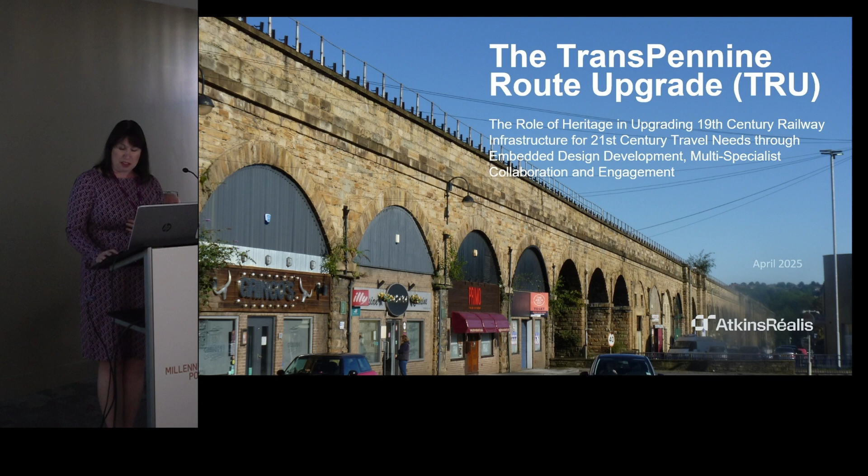Just a reminder of who we are. I'm Katie Rees-Gill, Associate Director for AtkinsRéalis. I've been with the company nearly 20 years, and I put that down to the really interesting projects and opportunities I've had. My colleague Matthew Jenkins opened the session, and he's had a very good stint with the company too, coming up to nearly 10 years.

What we both want to run through today is an overview of the scheme, for those of you that don't know it. I'm going to talk about collaboration in its widest and truest form, not just as a profession, but how we are seen by other disciplines and how we need to work with other disciplines, organisations and specialists. Matt will be talking about embedded design and a particular case study of Huddersfield Station, which is grade 1 listed. Then we're going to round the session with questions on both projects and both presentations.

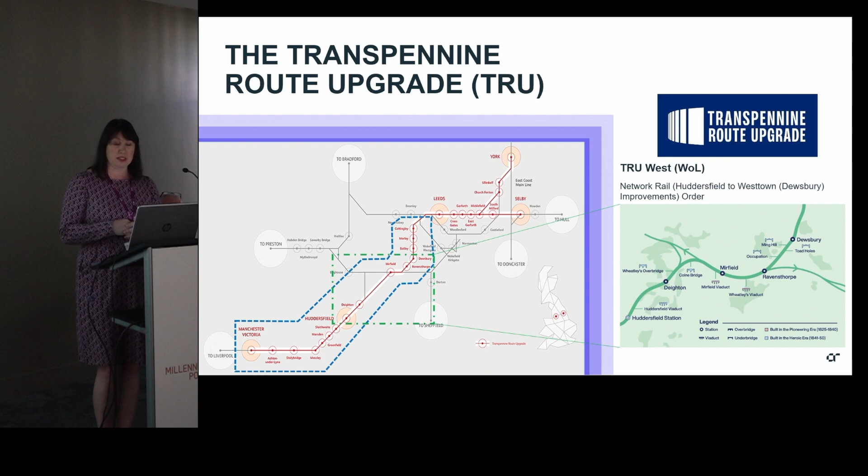So the TransPennine route upgrade, or TRU, runs from Manchester Victoria in the west through to York Selby in the east. We've been engaged in what's called the West of Leeds area of the project, which you can see highlighted in blue - Manchester Victoria, just shy of Leeds Station. This presentation today is focused on the area outlined in green, from Huddersfield Station through to Dewsbury. You can see the schematic on the right-hand side showing the 9 listed structures we've been managing as part of this upgrade.

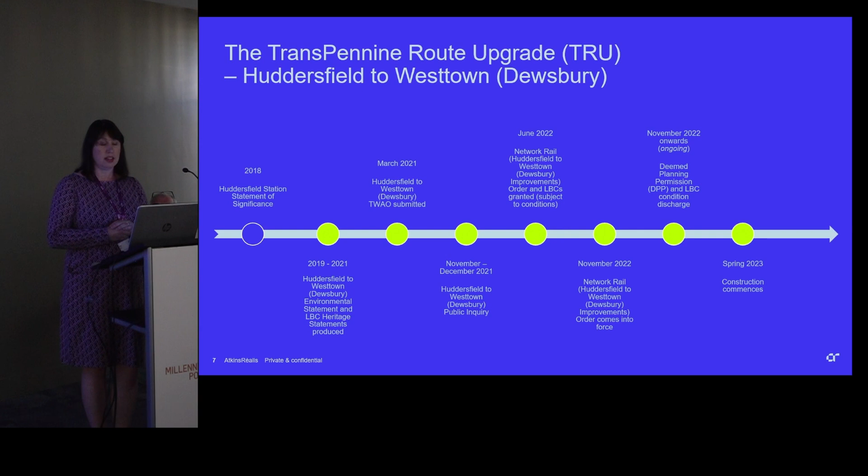We've been involved in the project since 2017, and a whole raft of documents had to be produced at the beginning, including the Statement of Significance for Huddersfield Station, the environmental statement and heritage statements to accompany the listed building consents. The Transport and Works Act order was submitted in March 2021, and at the end of that year there was a public inquiry. The order was granted in June 2022, along with the listed building consent conditions and planning permission. The order came into force in November of that year. We've been discharging those conditions since November '22, and construction commenced in spring 2023.

I want to show the range of partners, collaborators and specialists involved in the project. We've had to communicate and engage with all of these people, and it's right that we've been doing that. As you can imagine, that's quite complicated and shows there's a diverse range of specialists, knowledge and partners engaged in these big mega infrastructure projects.

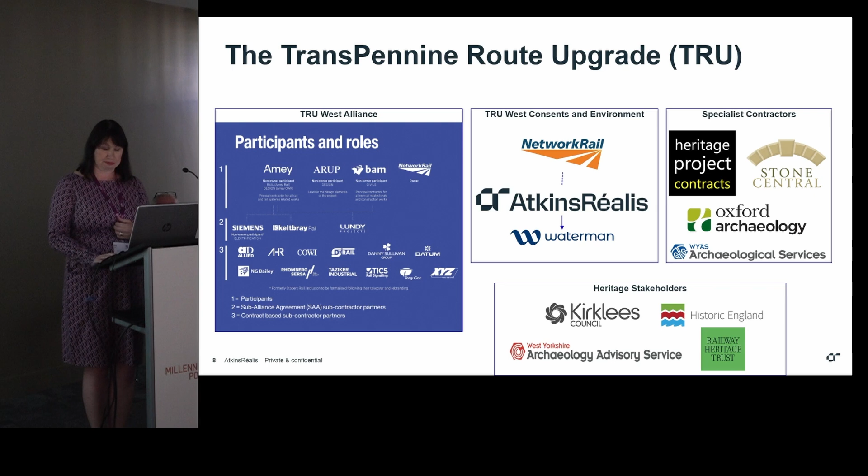So I'm going to talk now in a little more detail about the collaborative approach we've taken, how successful we think that's been, and how that's really helped to shape the design of this project and influence its delivery and implementation. I want to start by saying early engagement is absolutely vital - we've got to be invited to the party, we've got to have that seat at the table.

We've got clients such as Network Rail and National Highways wanting us involved in the early stages of these schemes, feeling we can make a valuable contribution to the concept, optioneering and design needed. This gives us an opportunity to find our voice, raise concerns and help de-risk the project. It's important we position ourselves at the very early start of engagement on these projects.

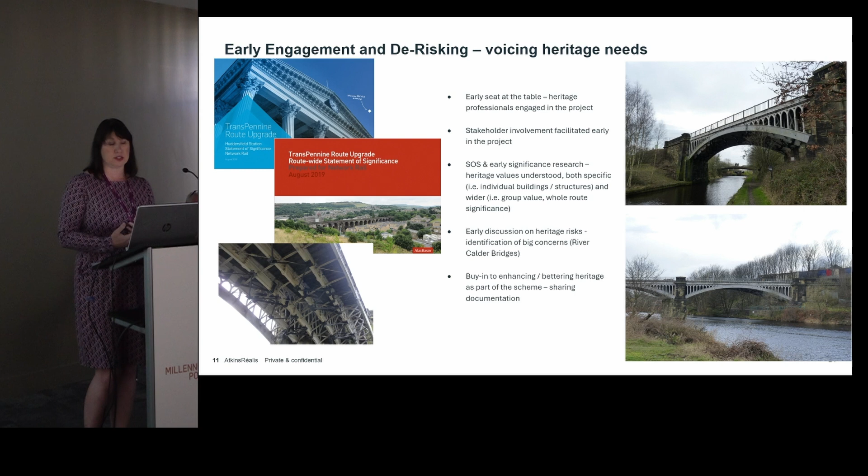That gave us an early opportunity to discuss the design of the new structure, the setting of these historic bridges, and how we could ensure their legibility and historic importance was still maintained. So we do need to consider that.

In the true spirit of collaborating, it's not just about us voicing our concerns - we also need to listen, to understand the project goals and challenges of these mega infrastructure projects. It's not about being a heritage specialist in isolation, in our silo. We need to understand the engineering language, what engineers are conveying when they speak to us, the design drivers we need to appreciate, and where the constraints lie. It's important we open our ears, sit down and listen to other specialists and designers, and appreciate what they're trying to do.

One of the most interesting elements of this project was that Network Rail were keen on what they called collaboration workshops, bringing all specialists together to talk about how they work, how they operate, how they think about problems, and how they discuss and disseminate information. This wasn't about creating a one-size-fits-all template - it was about appreciating that we all work and think differently, and incorporating that diversity into our day-to-day relationships on this project.

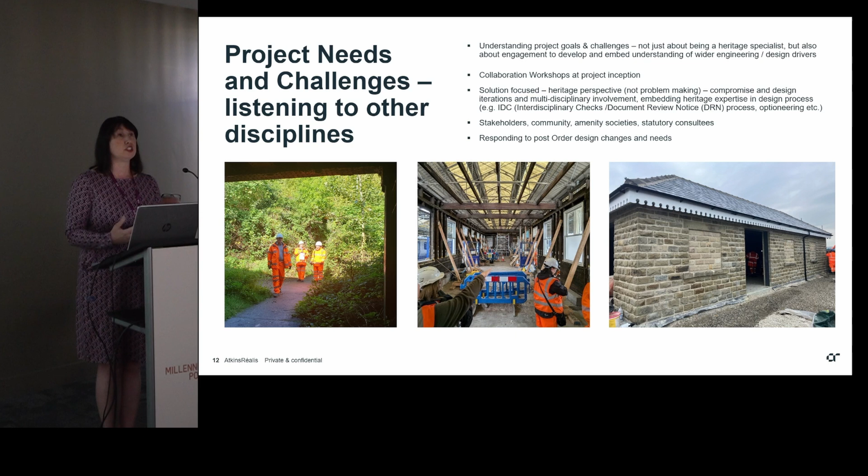We also need to think about how we can be imaginative and innovative, how we can do things that make these projects run smoother and actually bring benefits. One of the successful parts of this project has been the implementation of the Conservation Implementation Management Plans, or CIMPs, as we've called them for short.

Working with Network Rail, Kirklees Council Conservation Team, and Historic England, we came up with this approach, which would allow us to discharge conditions in a phased manner of partial discharge, so we could align with the construction sequencing of the project and enable the scheme to proceed. That's really important, that all parties agreed to this approach - it was tabled at public inquiry, we got buy-in, and that's been one of the most successful elements.

So, for example, Huddersfield Station, which Matt will come on to talk about in a little while, has had 5 rounds of CIMPs because of the complexity of the construction work and the amount of conditions we need to discharge as part of that work. But it's proved effective, efficient, and we've been able to work very closely with Kirklees Council in delivering that.

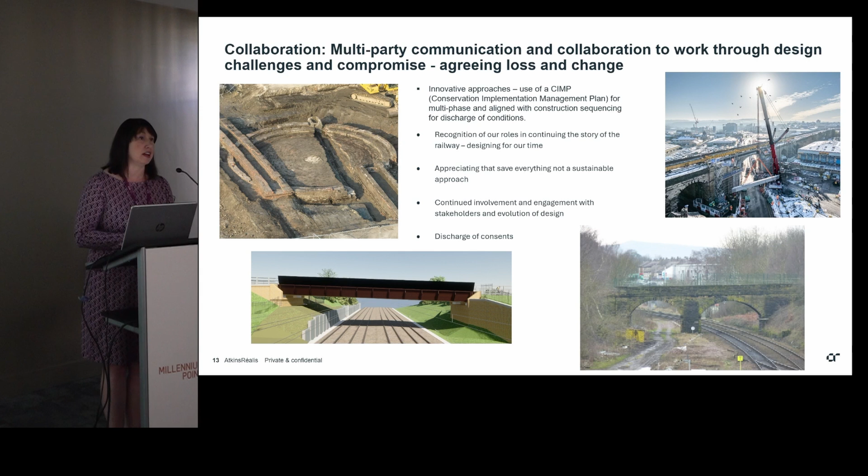We've got a visualization of that on the bottom left, replicating the industrial heritage of this area, and particularly the colliery found there.

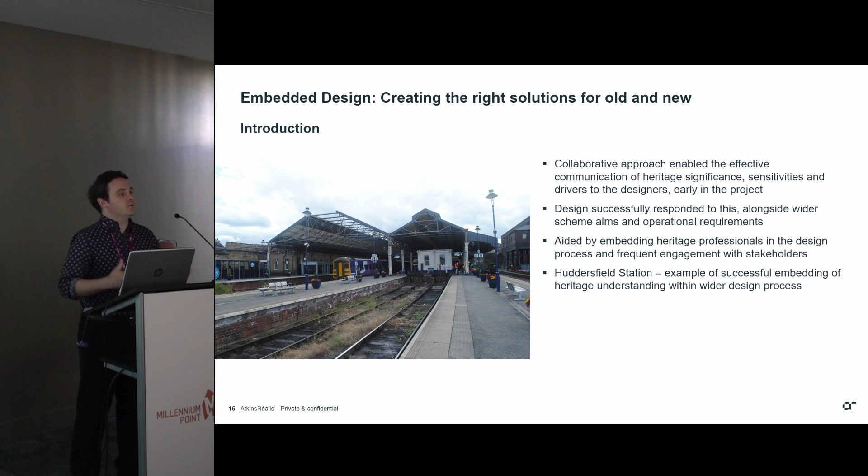From the statement of significance, one of the areas we identified as particularly significant to the station is the roofs, shown in the left-hand picture. They don't look like much, but they're actually quite important - a rare surviving example of what's known as a Euston Truss, named after Euston Station. This type of roof was used heavily throughout the country in the late 19th century, particularly by the London North Western Railway Company, LNWR. The survival of these is relatively slim - there aren't many left, and Huddersfield represents the largest example in terms of width of span.

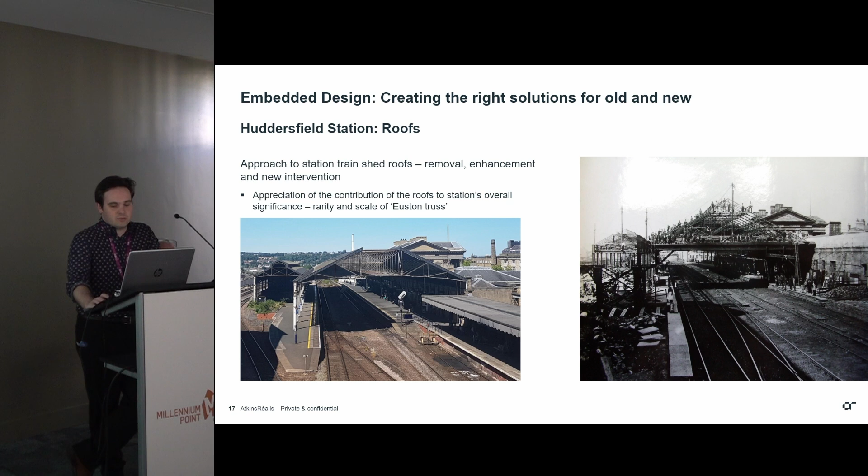The roof on the right-hand side, referred to in the project as Roof A, the principal roof span, is particularly noted for its rarity. I mentioned the criticality of the operational intervention at the station - one of the key things the scheme needed to do was enable greater train movement from one track to another through the station, as well as providing additional and longer platforms.

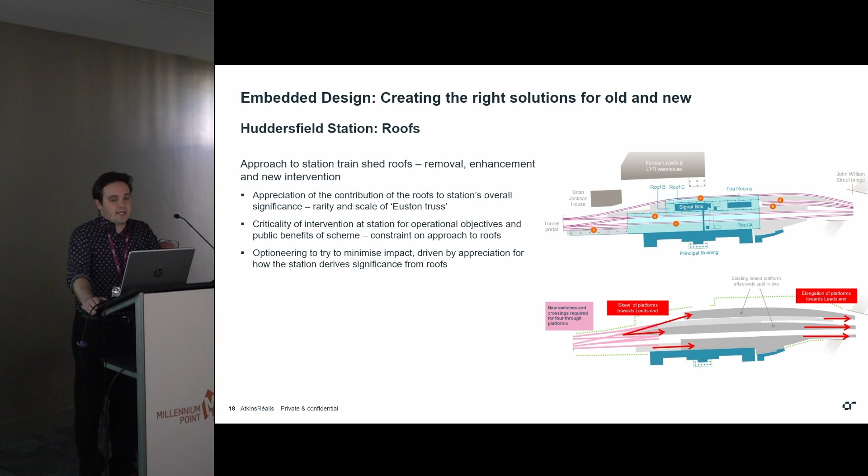If this station wasn't listed, if it was non-historic, those roofs probably would simply be removed. But obviously we knew we couldn't do that because of the contribution they make to the significance of the Grade 1 listed building. So we were heavily involved in an optioneering process to try and reduce the impact on the roofs as far as reasonably practicable.

and find solutions that can lead to the retention of heritage significance and that contribution that they made. The upshot of that was a decision to regrettably remove the smaller span of the roofs, Roof B and C, and also 2 bays of the end of the principal Roof A. But to retain the rest of the Roof A span, and importantly to look at opportunities to enhance it and better reveal its significance and the significance of the station as a result, as well as improve passenger comfort through doing that.

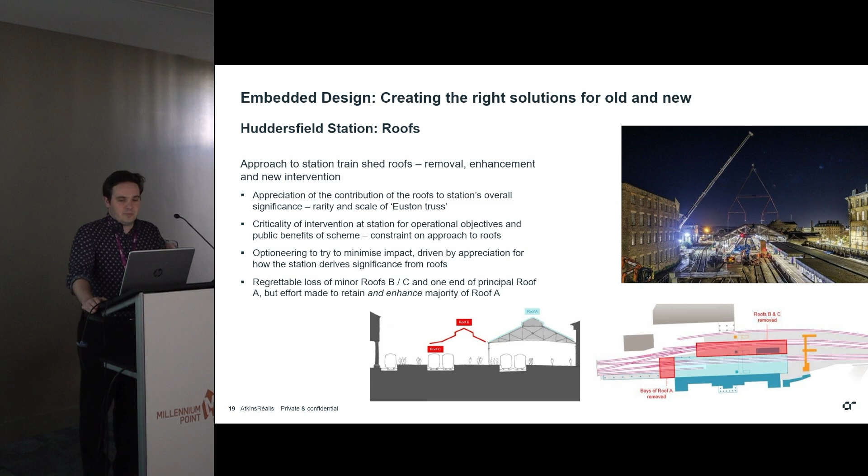So the works to remove the end bays of Roof A have already been completed, which is what the photo is up there. This is a snapshot of the work that's being undertaken at the moment on the roof.

So the design team within the TRU West Alliance at Arup, alongside ourselves, developed a scheme design that looked at strengthening and refurbishing the retained section of Roof A. In order to improve passenger comfort within the station and coverage of the station, we also reinstated the lantern that originally went along the top of the structure. That's not literally reinstated, that's as in we've designed one that draws from the original design.

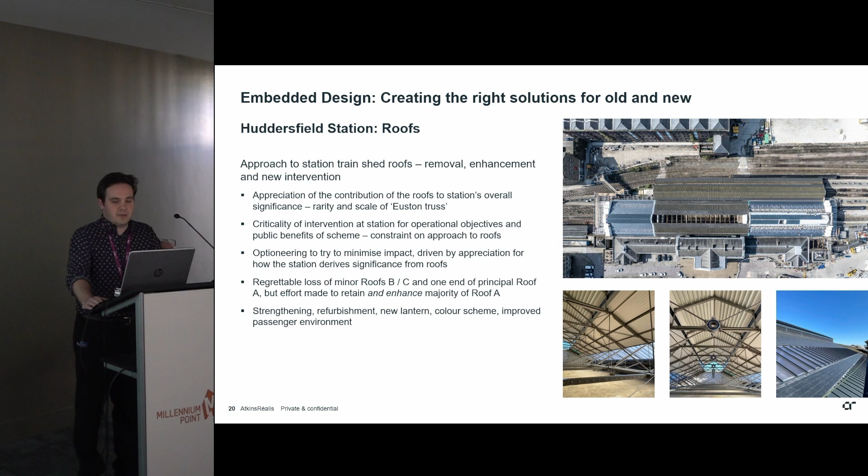There's an extensive scheme of recolouring and repainting of the underside of the structure, again to enhance the underside of it and the passenger experience, as well as improving the passenger environment generally through lighting, etc.

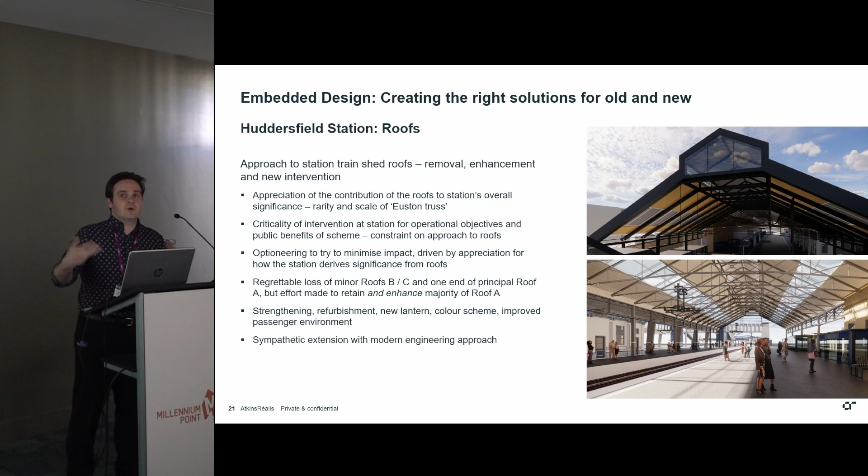Another element that's required is actually the extension of the roof, or rather providing passenger coverage at the northern end of the roof. Again, this has been chosen to be done as a sympathetic modern intervention, using a portal frame rather than an exact replica of the Euston Truss. We didn't want something that was pastiche, but instead draws on the design in a way where if you look down the roof in its length, you wouldn't necessarily notice any difference, but the closer you get, you've got that legibility of it being an additional intervention.

Obviously, if you take away roofs, you need to replace them, really. You can't leave passengers out in the rain, particularly in Huddersfield, where it rains a lot. So there were some key interventions required of new infrastructure at the station, namely new canopies to replace the roofs being removed, and also a new footbridge to aid passenger movement across the station. That was partly driven by an understanding of ped flow, pedestrian flow, how people move around a station space, but also planning for increasing numbers of services and hopefully increasing passengers in the future.

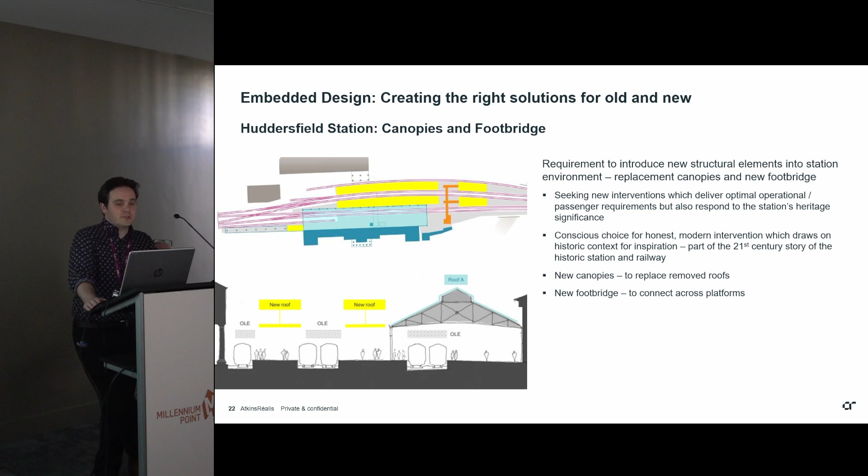There was a conscious choice made for an honest and modern intervention, looking at something which wasn't at risk of being pastiche, didn't draw too heavily from the historic, but which did actively respond to it and aim to not overwhelm the station in the way that it responds to the existing historic infrastructure. Looking at the new canopies, the design looked at using geometry which responds to the main roof, drawing from setting out points, looking at how the angles of the original roof work.

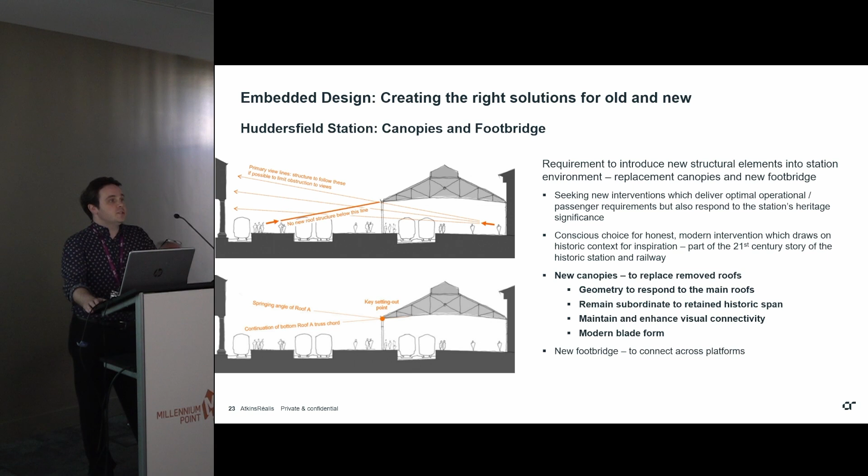That's also grade 2 listed. There's another grade 2 listed warehouse adjacent to it, and there's the opportunity to ensure that these canopies enhance that connectivity and people's appreciation of the wider landscape.

It was chosen to do them in a modern blade form. This is a common form of canopy at stations constructed in the 21st century in rail infrastructure, but all the geometry of those blades was drawn from responding to the key elements of the main roof, so that from the main platforms you get a view across, out between the two blades themselves, and the blades have the same angular geometry as the key retained section of the roof.

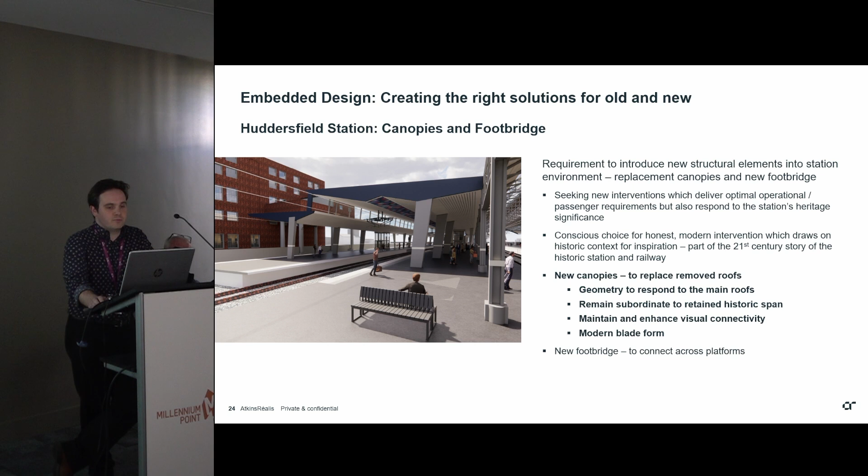With the footbridge, there was an appreciation that it would need to be introduced within the immediate setting of the station, at the northern end. So we wanted to ensure it minimised the impact on the setting as much as possible by being essentially as lightweight and see-through as possible.

Footbridges at stations, particularly those with electrified overhead lines, are heavily constrained by standards driven by passenger safety. This means the footbridge needs to achieve certain criteria: it needs to be entirely enclosed and covered, both to protect passengers from the weather and from the electrified lines underneath them. It also needs stairs of a certain length and angle, and lifts on all sections from all platforms, to ensure persons with reduced mobility can access across the station easily.

So the team set about designing a fully glazed footbridge. We then discovered through an environmental assessment that the angle of the footbridge means that on a sunny day, if you entirely glaze it with flat glazing, you would essentially blind train drivers as they pulled up to their positions in the station, because it reflects the sun straight back underneath the canopy.

So to address that, we looked at whether we could do something that relates back to the heritage of the station while also combating that issue. The design team came up with a sawtoothed approach to the glazing, which directs the sun away from the core of the station, and draws on the geometry of the station roofs. It can still be largely glazed and as lightweight as a footbridge possibly can be in this situation, but avoids any issues with glare.

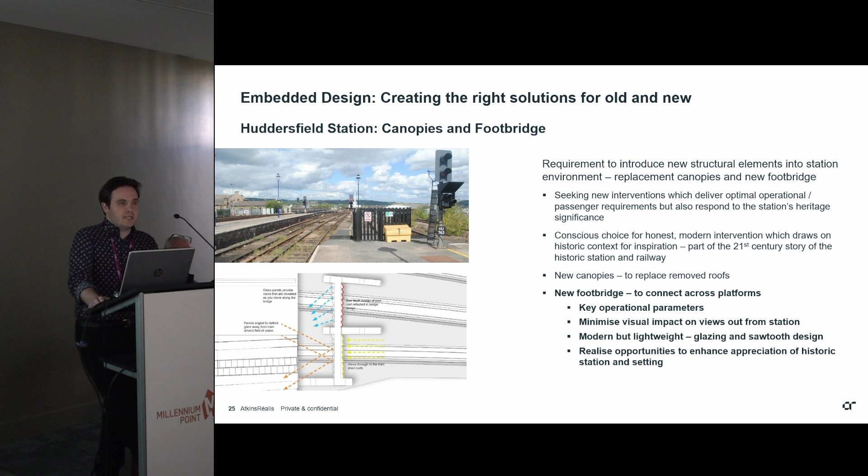Something else we were able to do through that is the fact that where the footbridge is positioned, and the position of the glazing, means that as you walk across it you'll actually be able to get a close-up view of the historic station roof. It introduces additional appreciation of that element of the historic architecture that people don't currently get.

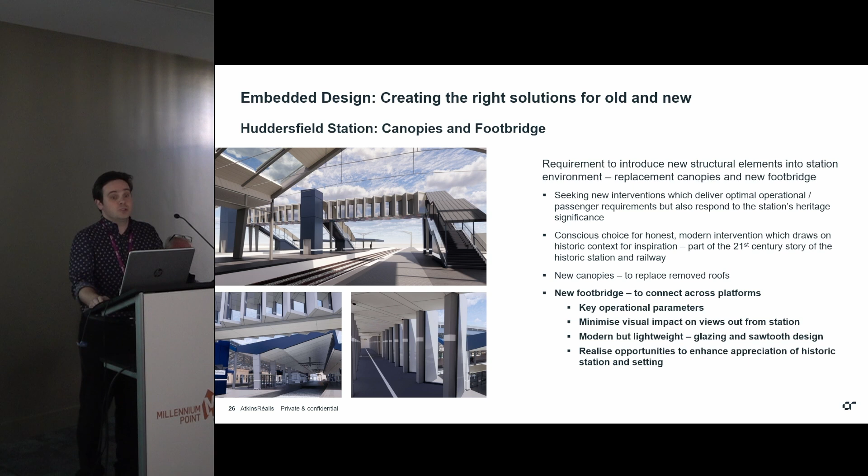Similarly, in front of Huddersfield Station is St George's Square, one of the most important locations within the town of Huddersfield, and also of intrinsic importance to the setting of the station because there was an integral historic chronological development link between the station and the square. This footbridge will actually enable views out over the station building into the square, which you again don't currently have.

The final element I'll touch on is the tea rooms and refreshment rooms on the station. This building is another example of a rare surviving timber-boarded tea room dating from the 1880s. Like the roofs, this was a relatively common feature on stations in the late 19th century, but is increasingly rare.

The Huddersfield example is notable further because of the slight classical motifs in its design, but also the fact that it's actually retained its original use completely. So it has a refreshment room at one end and waiting rooms and toilet facilities.

This building was another element, a bit like the roofs, where when you make the platform adjustments that are required, the building is too close to the platform edge.

So we needed to do something with the building to address that issue. Obviously, we didn't want to truncate the building in any way or change its architecture, which might detract from it. So we looked at whether you could lift the building up and move the whole thing, retaining its position on the platform and sliding it across.

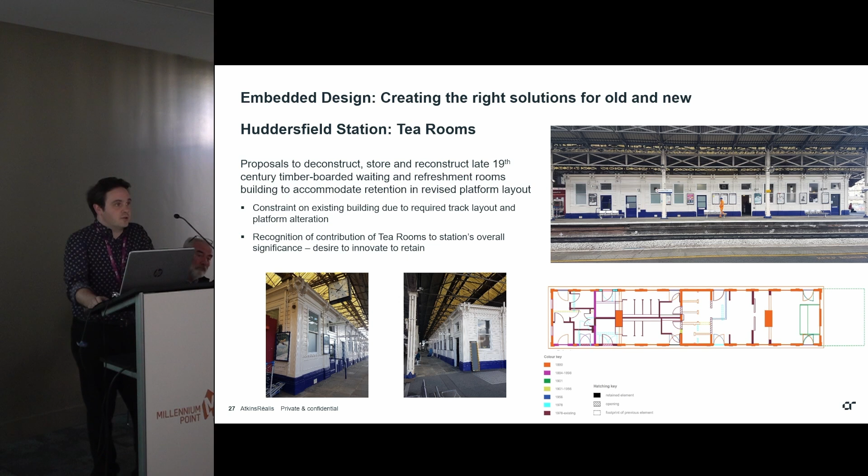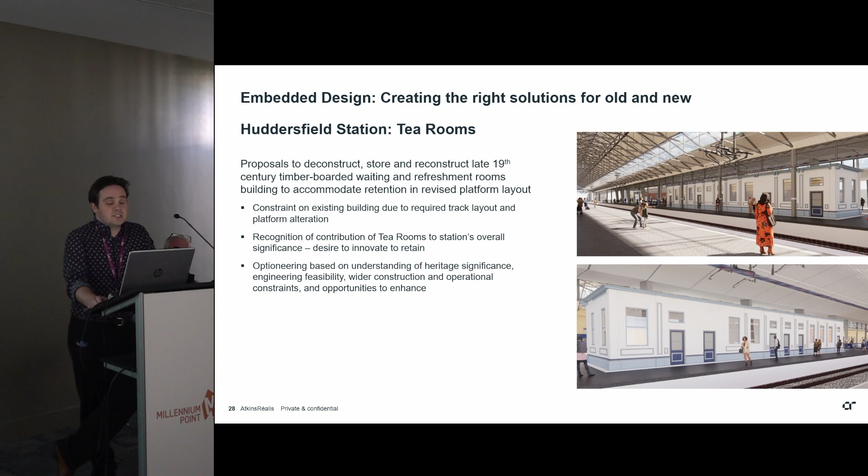That proved too difficult to achieve. The next best option, given it's timber boarded, was to take the entire thing to pieces, store it, recondition it, and rebuild it in its entirety in its external form as it is today. The design team took that forward and looked at how to do it while also implementing improvements to enhance its operational use.

It has now completely disappeared. So if you go to Huddersfield Station today, there's no tea rooms, because it's all in a warehouse in Shropshire being reconditioned, and it will be rebuilt when the scheme is complete.

It'll be located slightly closer to the roof A columns in order to position it appropriately in relation to the platform edges. It will also be adapted and improved, with improved fire engineering implemented to protect it, and increased energy efficiency measures within it.

The servery is being changed slightly, and the entire building's relationship is being spun round 180 degrees in order to embed the refreshment room more within the heart of the station, to get people to use it more and hopefully appreciate that element of significance a little more.

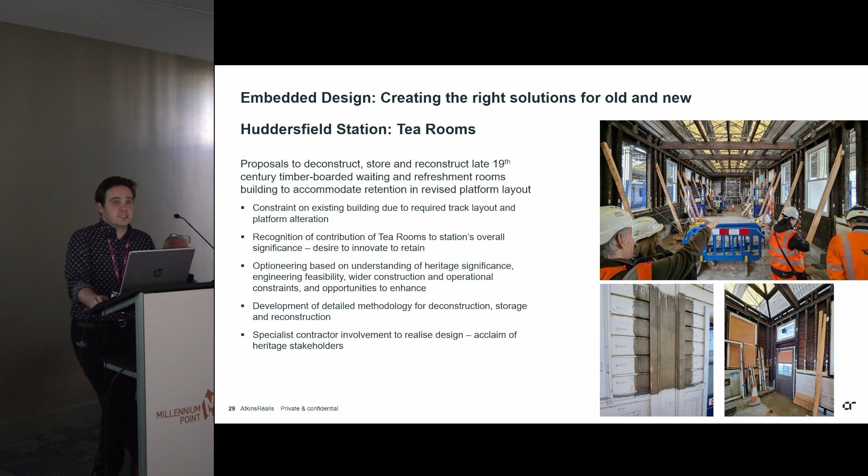This element of the scheme in particular has received great acclaim from Historic England and Kirklees Council's conservation team, and it's been fantastic to see this project come along alongside them.

I'm going to skip over those two slides as we're running short on time, and come to a bit of a conclusion on measures of the success of the approach at Huddersfield Station so far. I say so far because the scheme is only about 2 years into construction and has 3 or 4 years to go.

On consenting, there were no objections to the listed building consent for the works to the station, including no objection from Historic England. Indeed, Historic England were actively supportive of the proposals, and all LBCs related to the station have been granted, with conditions being discharged at the moment, as Katie mentioned.

We've had ongoing collaborative engagement with stakeholders, as I touched on, and the relationship with Historic England and Kirklees Council is very positive and ongoing. There's also been really effective internal relationships between ourselves as the consents and heritage team and the design and construction teams working on the scheme at the station.

That continues on a weekly basis in terms of our engagement with them, site visits and meetings on site to discuss how works are going. The best practice from this section of the scheme is being taken forward to wider sections of the TRU project, and the emerging realised design itself is testament to the success of this element of the scheme.

So the design approach we've implemented here has really been successful in unlocking both the wider project objectives of a station delivering improved rail services across this section of the north of England, but also achieving quality outcomes for the historic environment by embedding that understanding early on in the process and shaping design accordingly.